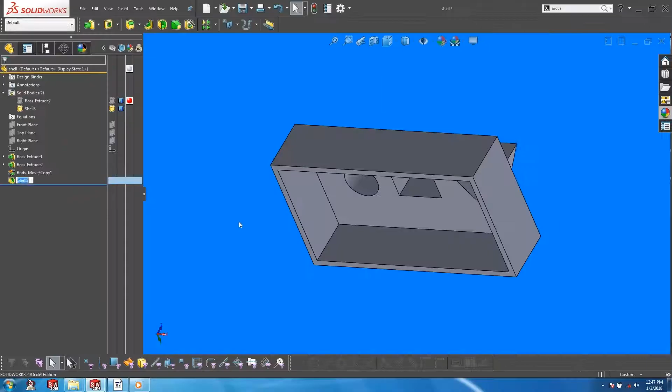We are going to start with this simple model here. I've also prepared a drawing with a cross-sectional view so that you can see what is going on with the model as we do the shelling. So let's start the shelling feature. The first option is the thickness, which we will set to be 5mm. Essentially, this is the amount of material that will be left once the internals of the model have been removed.

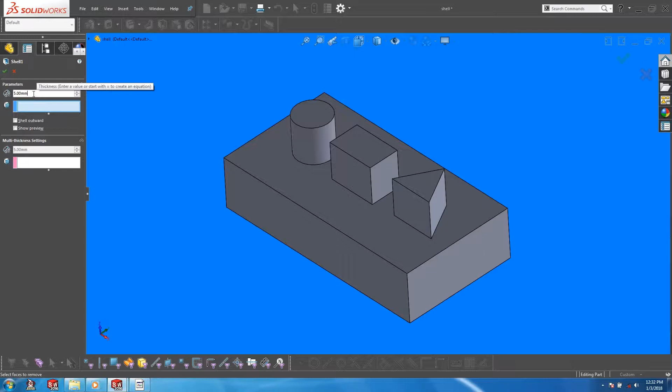Next, we are asked to pick the faces to remove. Once the shelling is done, these are the faces where there will be no walls. In our case, we will pick the base. Let's say that we want the shelling to go all the way through the cylinder. We will then pick on the top face of the cylinder.

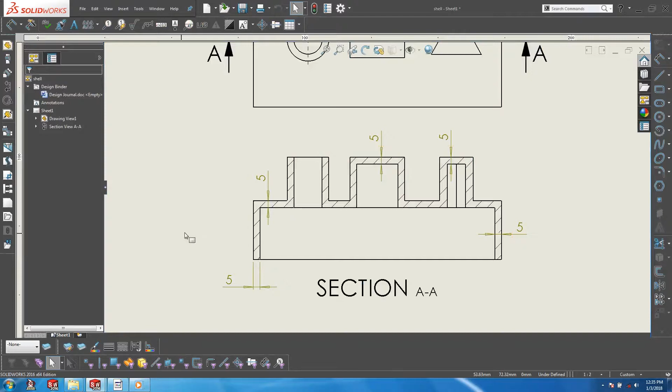Let's click OK and look at the drawing. As you can see, there is an even wall thickness throughout, and in the case of the cylinder, it is shelled all the way through.

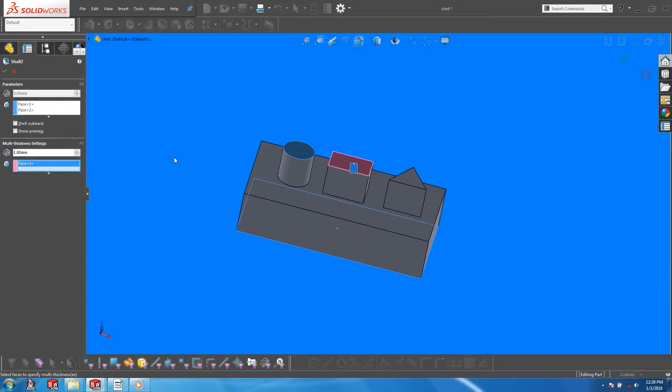Suppose that we need to have a different thickness for the rectangular shape protrusion and a triangular shape protrusion. Activate the multi-thickness surfaces field. Pick on the rectangular face and set the thickness to 1mm. Next, pick on the triangular face. At this point, this face is going to assume the same previous thickness of 1mm. To change that, key in the required thickness as that surface is selected.

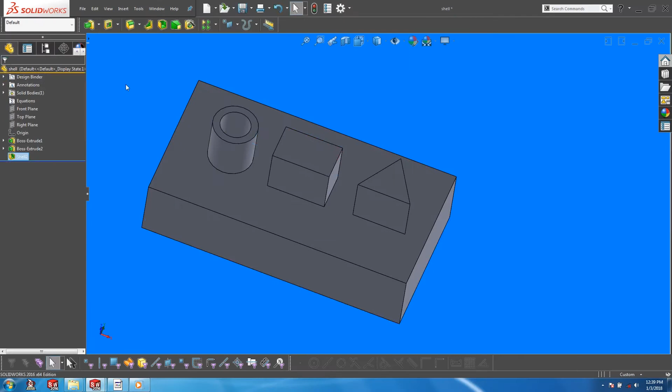It is always a good practice to cycle through the faces to check that the thicknesses entered are correct. So let's exit out of the feature and take a look at the thicknesses in the drawing.

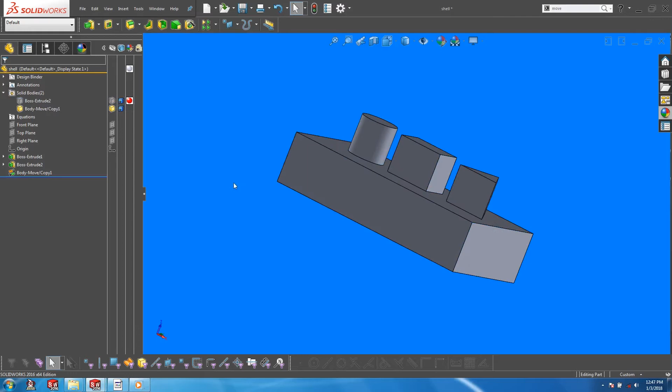Let's take a look at the option to shell outward. To demonstrate this option, I've created a copy of the model and stacked it right on top of the original. I'm going to change the original body to red and hide it from view. So let's perform a shell on the new body and choose the shell outward option this time round.

Let's unhide the original body and take a look at the cross section. You can see that the shell outward option essentially creates a skin around the original body.